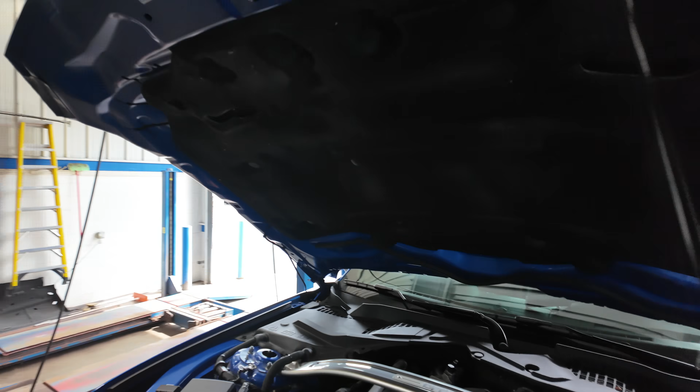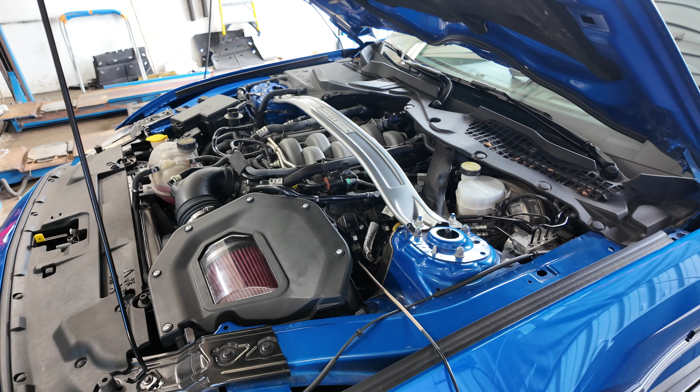2018 Mustang GT up on the dyno. So let's go take a look at what we got. Manual transmission, Gen 3 Coyote. We got a cold air intake on it, if I can get my camera on it here. Cold air. We put inch and 7/8 Kooks headers on it. It's got a resonator delete to the stock valved mufflers, and that's pretty much it. 91 octane tune, so nothing crazy with the fuel pump gas deal.

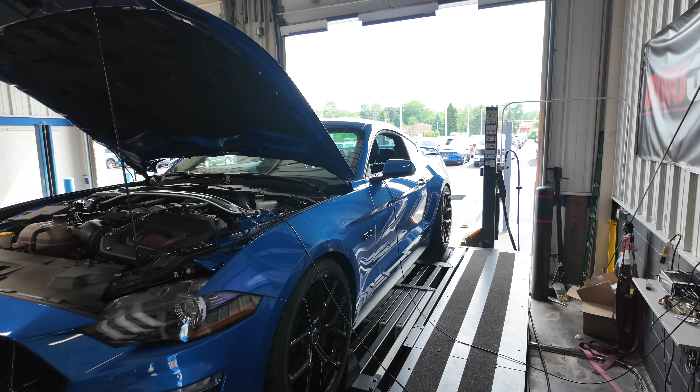We put some lowering springs on the car, so it's got a nice little stance. Put some different wheels on it, and I'm doing a dyno tune right now. So this is where we're at right now. 442, 401 torque is my best. Those are the last two I just did. So we'll record a third pull here. We'll take a look at the data log.

And this car I'm using PCMTec on. I'm still using HP Tuners for the logging, but I've been moving to PCMTec for the engine side of things on these Gen 3 Coyotes and GT500s because I just personally like the software a little better. There's a lot more tables available to adjust for some of the stuff we get into. It's a little bit more in-depth, and it's working out really nice for us.

So again, this is where I'm at so far. I think this is going to be about the final. Play with the fuel a little bit. Obviously we put headers on them. I changed some cam angles just slightly, and yeah, so far so good. So I'm going to put the camera back up on the rack there. We'll log, we'll video one more pull, and we'll take a look at the final.

All right, guys, so final pull there. Let's take a look. Pretty much identical to the other two. Dropped off 9/10, 8/10 of a. It's getting a little hotter. The coolant temps on that pull were 200, but that's where they run. So I like doing multiple pulls in a row. You might see a couple little differences too, but it's just kind of the artifacts of a dyno.

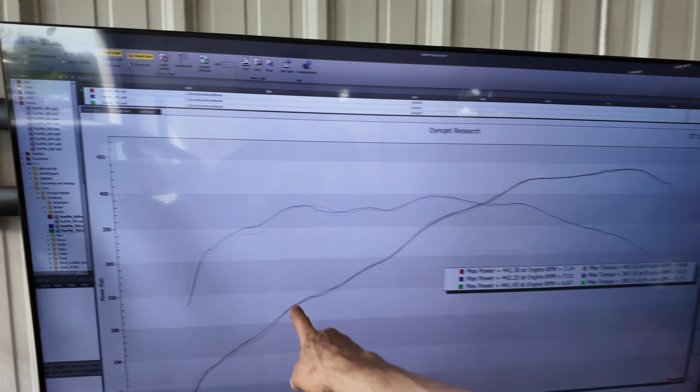I did add a little bit of fuel down here, which picked up versus that red run. And we'll look at the log, but it being on 91 octane, the timing system, the HDFX system, is adding and taking timing away as it sees needed with the knock sensor. So I'll kind of show you that on the logger here.

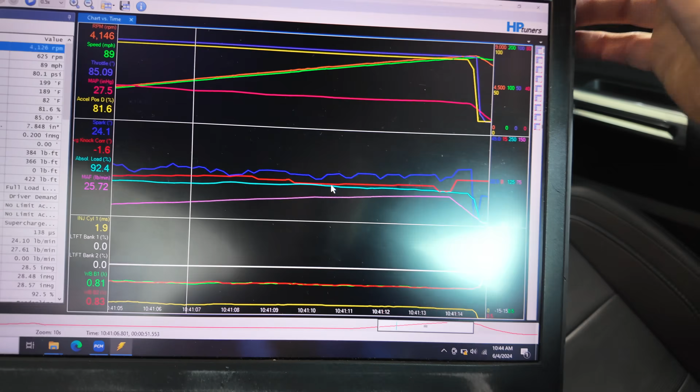And my battery's about to die on my laptop, so we'll be quick. Pick this up here. Okay, so that dang glare. Okay, let's go like that.

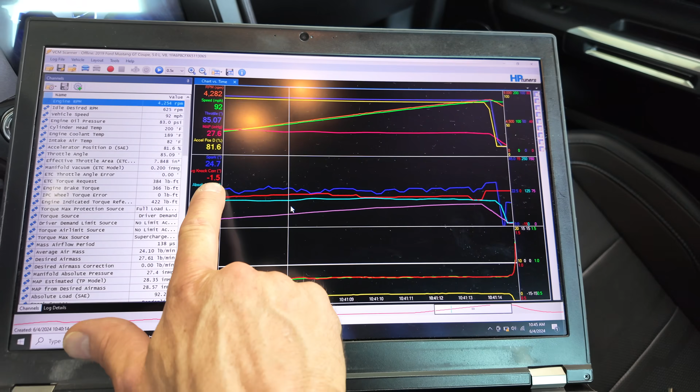Timing, let's start with that first. So you can see my knock. It's pulling a little bit. And this is kind of my timing curve for these bolt-on Coyotes that I put in here. So, yeah, this battery's about to die, so we'll go quick. If you were to run 93, it would add most of this timing back in. And I really like to try to get them to like 26, 27 degrees on pump gas if we can. They will make a little more power like that.

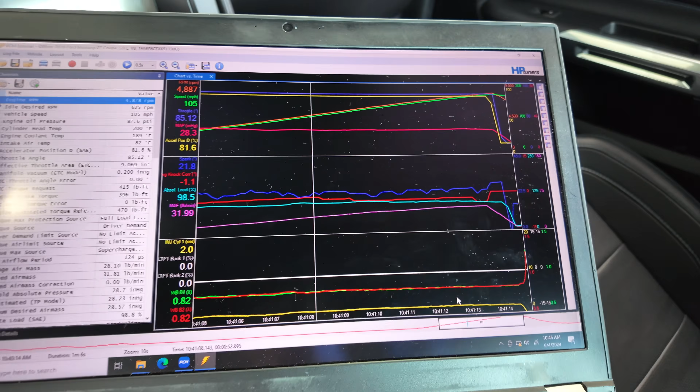Obviously on E85, these things will make power all the way out to almost 30 degrees of timing, especially out at the top at 7500, 30 degrees for sure. So air-fuel ratio: if you LS guys are watching this, you'll notice how rich we are, and that's where Coyotes like to run. Even the NA stuff likes to be in that low 0.8 lambda. So low 12s, right around that 12.0 mark for air fuel. That's where they make the most power, and that's where they'll take the most timing.

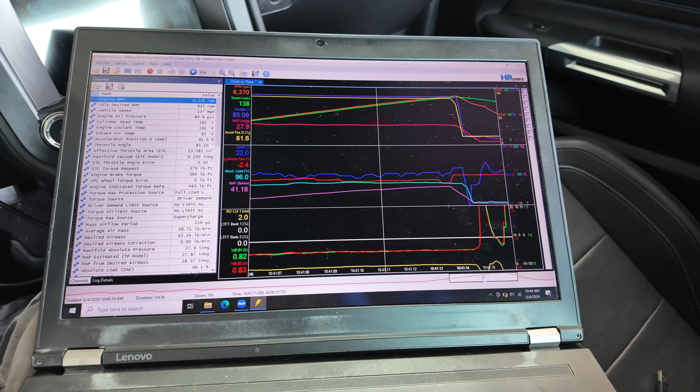They're very tolerant of rich mixtures because the combustion chamber is really efficient on these things, and they'll burn a rich mixture pretty well. GT500s are kind of the same way. When we're on pump gas on those cars, I run them pretty rich. I'll run them low 11s, 11.0 even, and that's where they'll take more timing. And because the power doesn't drop off with a richer mixture, more timing is going to be more power.

Especially, these engines are high compression. These Gen 3 Coyotes are 12-to-1 compression. So the more timing you can put in them, the more power they make. That's why they love E85.

So that's why E85 will routinely see 25 to 30 wheel gain over pump gas, especially 91 octane. 30 wheel is pretty typical on a gain going from 91 to E85.

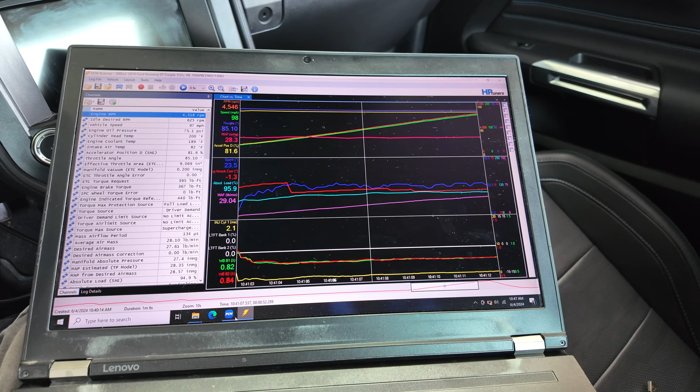And I've gone over PCMTEC in some of my past videos, but it's a little different than HP Tuners. A lot more stuff. There's just every single table that's in the processor here, and some of them don't pertain. They kind of just pull everything out and give it to you, and then whether or not it pertains to the specific car you're tuning, you've got to figure that out, which I kind of like. I've been tuning for a long time, and I'm comfortable with navigating stuff like this.

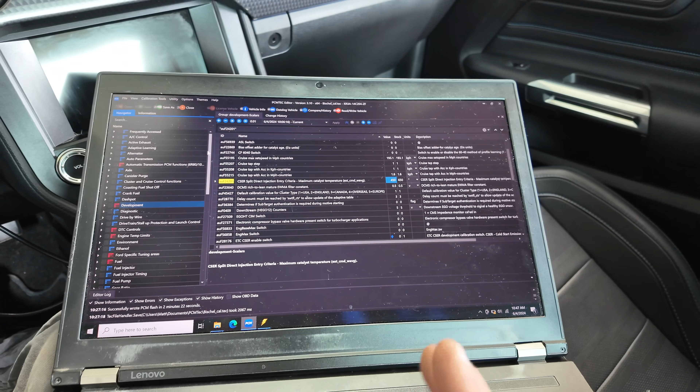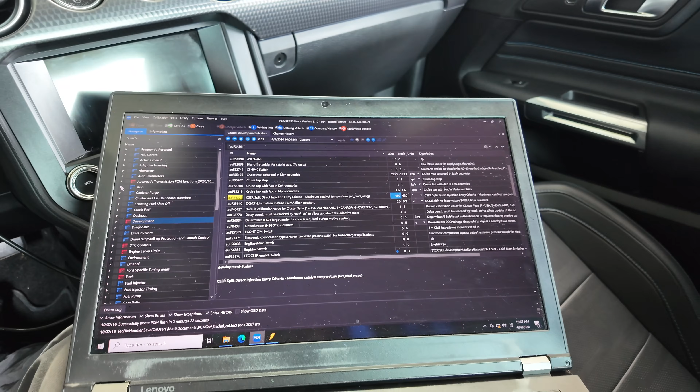So yeah, really cool stuff. More of a tree view versus HP Tuners, which kind of has that table view where it's laid out. I don't have it open right now, but I've been switching to this. Plus, these guys have some flex fuel options with adding a flex fuel sensor with a custom operating system for Coyote stuff, which I'm going to be implementing in the future on my car and some of the other customers we have that race GT500s, and that's going to trickle down to stuff like this.

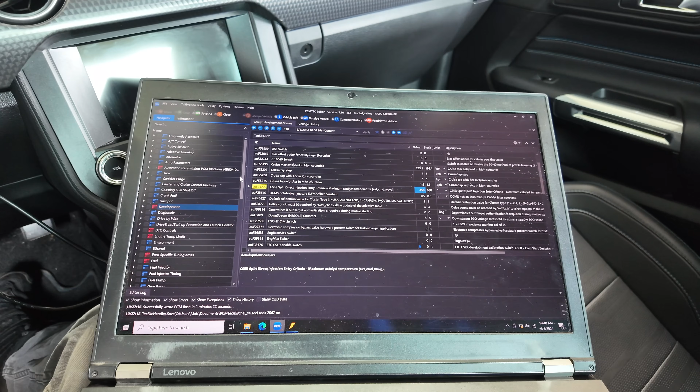So we can add a flex fuel sensor, and the guys will have the option without trying to use that Ford inferred stuff that doesn't always work the best. They'll actually have a sensor that will feed direct info as to what the ethanol content is right into the PCM.

So yeah, that'll wrap it up for this one, guys. I'm making this pretty quick because it's the middle of the day here, and we're of course swamped. So I'm gonna wrap this one up.

We're gonna take a look at this graph one more time. I don't have a baseline for this car because we got it in and we did the headers. The car already had that cold air intake on it. We put the long tubes on it, put the springs on it, did an alignment, an oil change, brake flush, a bunch of different stuff to it for maintenance. And this is where we're at. So I'm thinking that looks really nice.

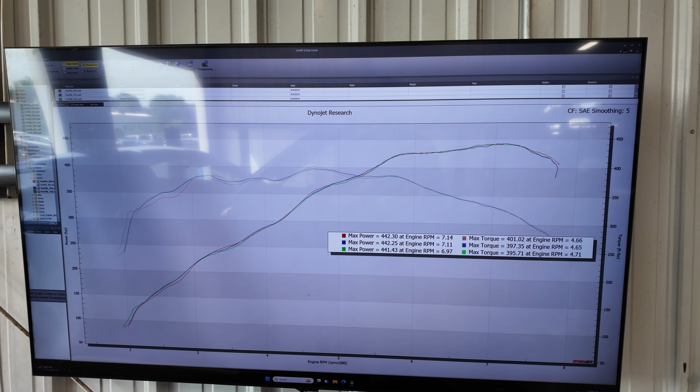And I'll add one more thing. I talked about it a couple videos ago, about 10 speeds versus MT82s in the 18 and up. The D4 MT82 in the 2018 and up Mustangs is a really super wide ratio, unlike the 10-speed, which is super close. So these cars typically aren't quite as fast accelerating when you're running them through the gears as a 10-speed car.

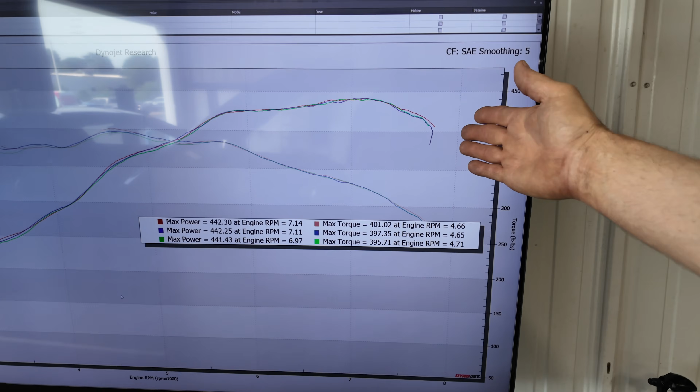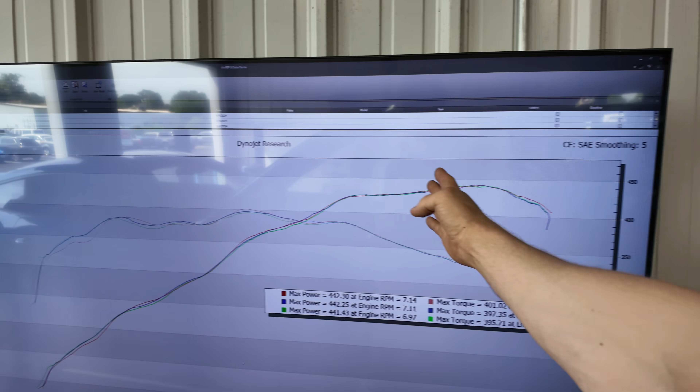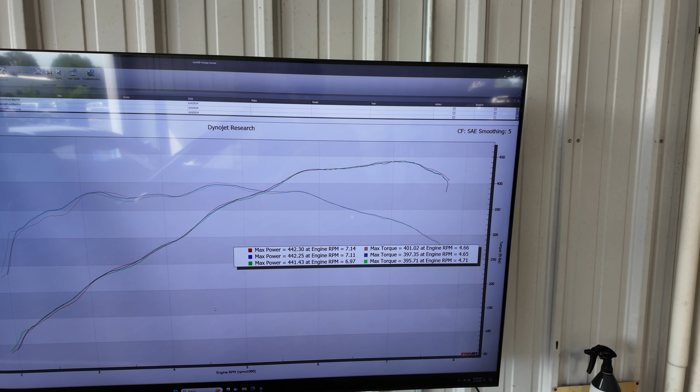And I'll say this to the customer again too, but I really emphasize really winding out the manual cars, the D4 cars like this. You really need to give it some RPM, because the shift recovery is back to like here on these, especially the 1-2 and the 2-3 shift. It's a massive drop because the gear spacing is really wide. They switched the overdrive in the MT82 in 2018 from 5th to 4th gear, and they widened all the gear spacing way out.

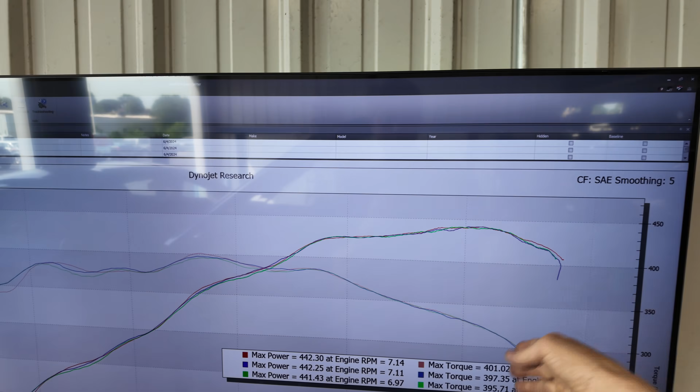So to get these cars to quarter mile really well and 60 to 130 really well, you really got to ring them out, 7700, 7800, where the 10-speed, you can shift them right up here at 7300, 7400, and they're only going to drop back to like 6500. So the 10 speeds, you can keep them right here. The manual cars, you got to wind them way out here because they're going to drop way back.

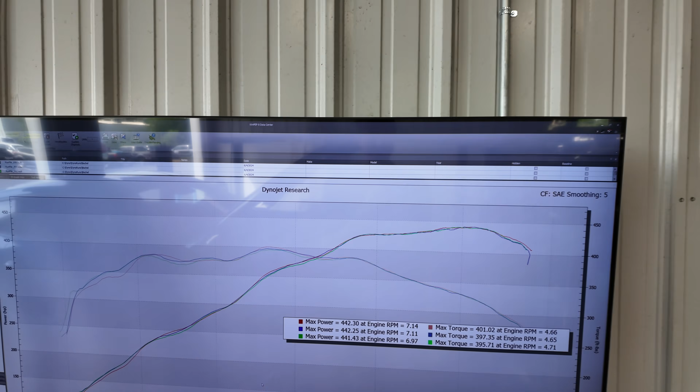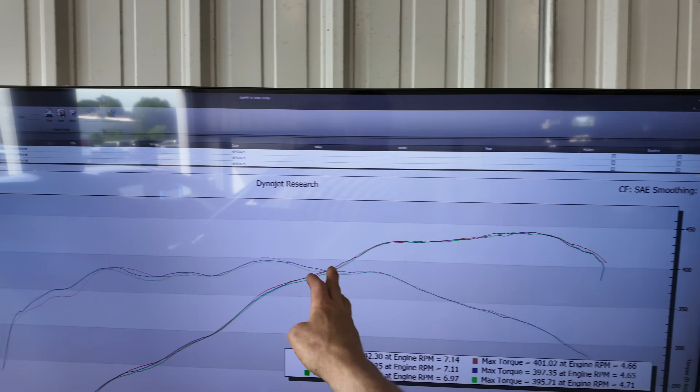8,000 RPM limit on this car, and you're going to end up using most of it. 7800, I would be shifting this car right out where I took it, right to 7800 there. You can see it starts to drop off pretty hard at about 7500, 7600. It starts to roll over pretty hard. But you got to get into that a little bit, because otherwise you're dropping it all the way back here and you're down below what you're falling to up here.

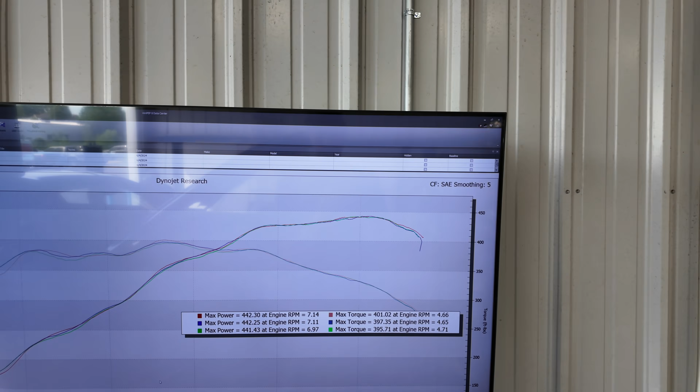So shift points, shift RPM, and shift recovery have a super big role in all these modern cars with the different transmissions. That's why the 10 speeds accelerate so well, because they hold such a narrow RPM and they hold it right at the peak power. So pretty cool stuff. I like getting into that stuff and trying to get guys going fast.